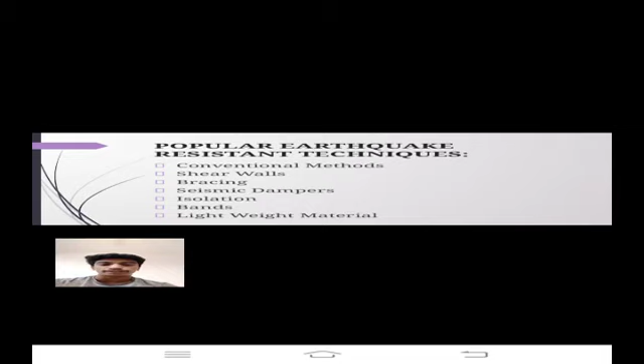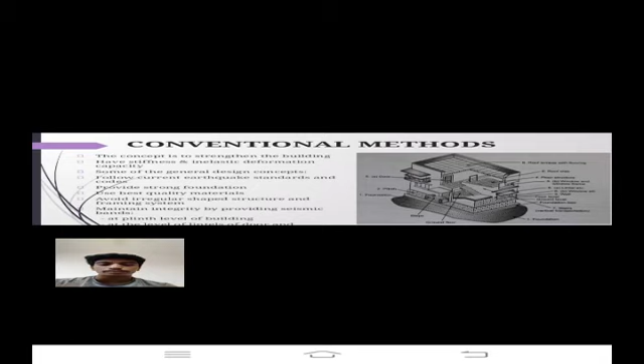There are some popular earthquake resistant techniques: conventional methods, shear walls, bracing, seismic dampers, isolation, bands, lightweight material. First, conventional methods. The concept is to strengthen the building, have stiffness and inelastic deformation capacity. Some of the general design concepts: follow current earthquake standards and codes, provide a strong foundation, use best quality materials, avoid irregular shape structure and framing system, maintain integrity by providing seismic bands.

And there are some remedial measures for soft storey buildings. The first diagram shows bracing in columns of the open ground storey. The second diagram shows providing an RC shear wall, and the last diagram shows providing brick infills between columns.

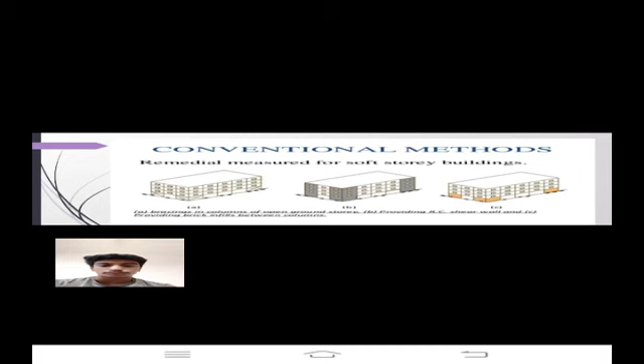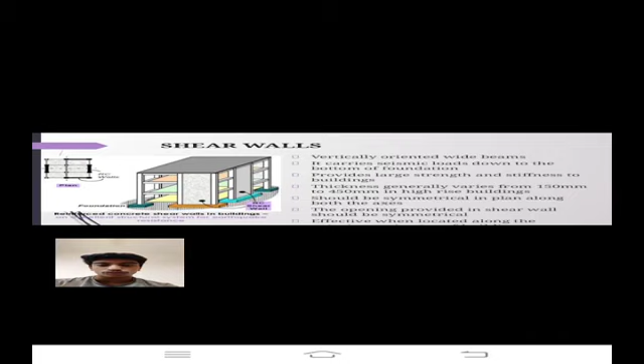Next is shear walls. They are vertically oriented wide beams. It carries seismic loads down to the bottom of the foundation and provides large strength and stiffness to buildings. Thickness generally varies from 150 mm to 450 mm in high-rise buildings. It should be symmetrical in plan along both the axes. The openings provided in shear walls should be symmetrical. In this picture we can see the RC shear wall foundation, and at the corner we can see the plan.

Next is bracing, a system utilized to reinforce building structure in which diagonal supports intersect. Cross bracing is usually seen with two diagonal supports placed in an X-shaped manner. Under lateral force, one brace will be under tension while the other is compressed. Braced frames are primarily utilized as lateral load resisting systems.

In the following diagram there are some bracings. First is V bracing, then inverted bracing, meaning opposite. There is diagonal bracing, X bracing and K bracing.

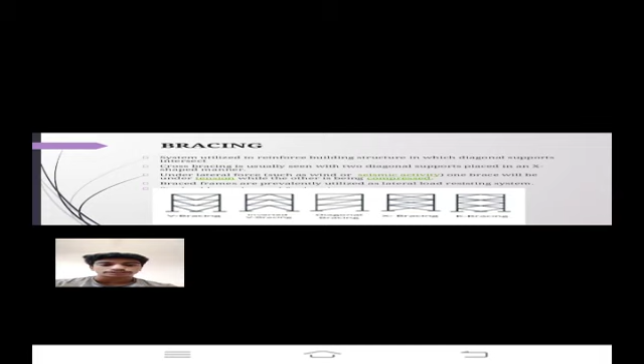This is an energy dissipation device, seismic dampers. This diagram shows the energy dissipation device. These are used in place of structural elements such as diagonal braces. It acts like the hydraulic shock absorbers in cars and is usually used for protecting tall buildings. When seismic energy is transmitted through them, dampers absorb part of it and thus damp the motion of the building.

There are some types of dampers: viscous dampers, friction dampers, and tuned mass dampers. Viscous dampers reduce the vibration by fluid action. Friction dampers reduce the vibration by rubbing at surfaces. Tuned mass dampers reduce vibration by harmonic action.

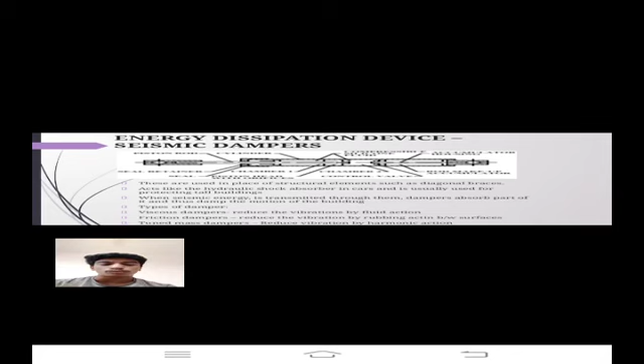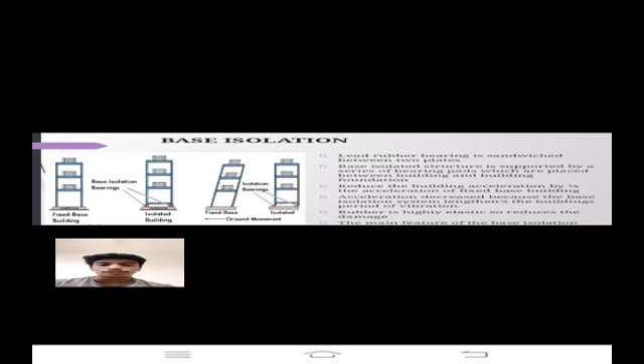Next is base isolation. A lead rubber bearing is sandwiched between two plates. A base isolated structure is supported by a series of bearing pads which are placed between the building and the building foundation. It reduces the building acceleration to one fourth the acceleration of a fixed base building. Acceleration decreases because the base isolation system lengthens the building's period of vibration. Rubber is highly elastic, so it reduces the damage. Here in this picture we can see a fixed base building and an isolated building.

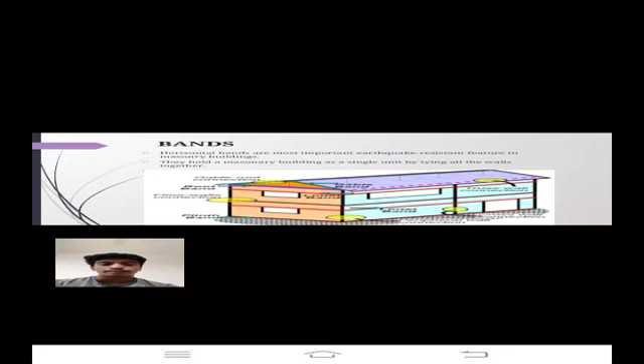Next is bands. Horizontal bands are the most important earthquake resistant feature in masonry buildings. They hold a masonry building as a single unit by tying all the walls together. In this picture we can see the gable band, roof band, lintel band, and at the bottom we can also see the plinth band.

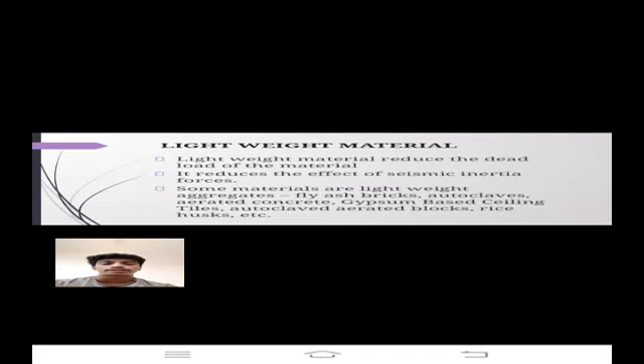Last is lightweight material. Lightweight material reduces the dead load of the structure. It reduces the effect of seismic inertia forces. Some lightweight materials are fly ash bricks, autoclaved aerated concrete, gypsum based ceiling tiles, autoclaved aerated blocks, rice husk, etc.

There are some suggestions. Avoid weak column and strong beam design. Provide cross walls which will stiffen the structure. Provide a thick slab which will help as a rigid diaphragm. Provide shear walls in symmetrical fashion. Increase the transverse reinforcement.

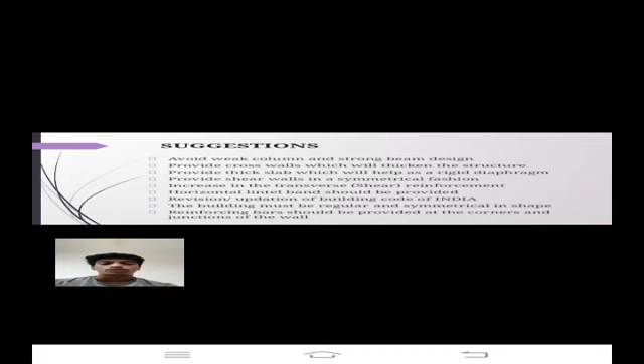A horizontal lintel band should be provided. Revision and updation of the Building Code of India. The building must be regular and symmetrical in shape. Reinforcing bars should be provided at the corners and junctions of the walls.

Next are the conclusions related to earthquakes. The work in the field of earthquake resistant techniques is very important to have safe structures. Techniques of earthquake resistance are not to strengthen the building but to reduce the earthquake generated forces acting upon it. Effects made by earthquakes mainly depend upon acceleration of the base and mass of the building. In this paper, a number of traditional and modern techniques have been discussed which are adopted in construction practices for improvement in the earthquake resistance of a structure.

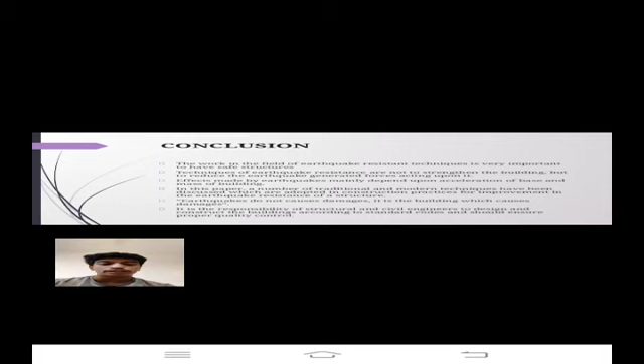Earthquakes do not cause damage, it is the building which causes damage. It is the responsibility of structural and civil engineers to design and construct the building according to the standard codes and ensure proper quality control. Next are some references relating to this project.